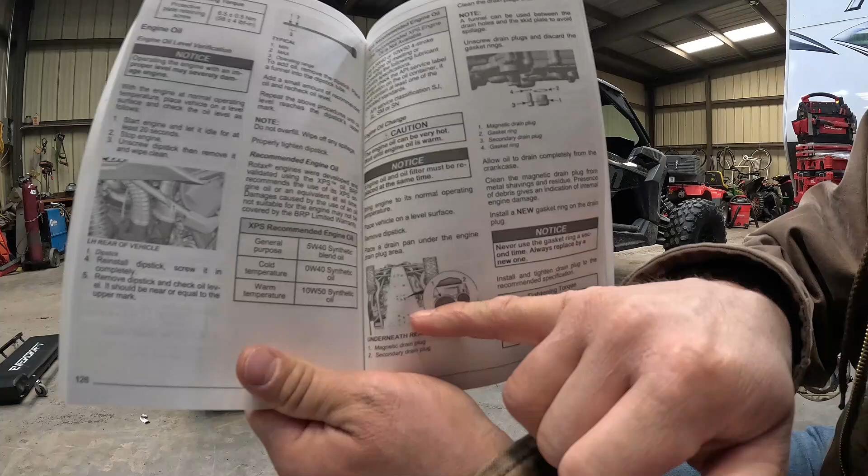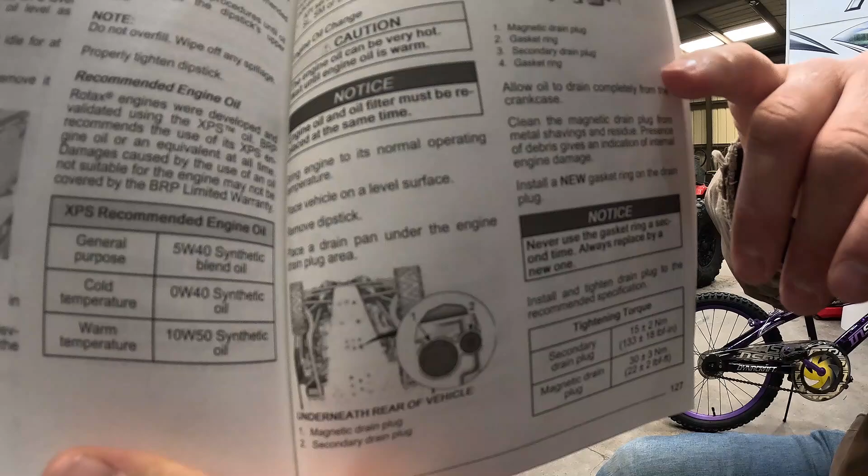When you crawl underneath your machine, you're going to find this hole here in your skid plate, and you're going to look up and see two bolts. One's going to be your primary magnetic drain plug, which is the big fat one, and then your secondary, which will be the skinny one.

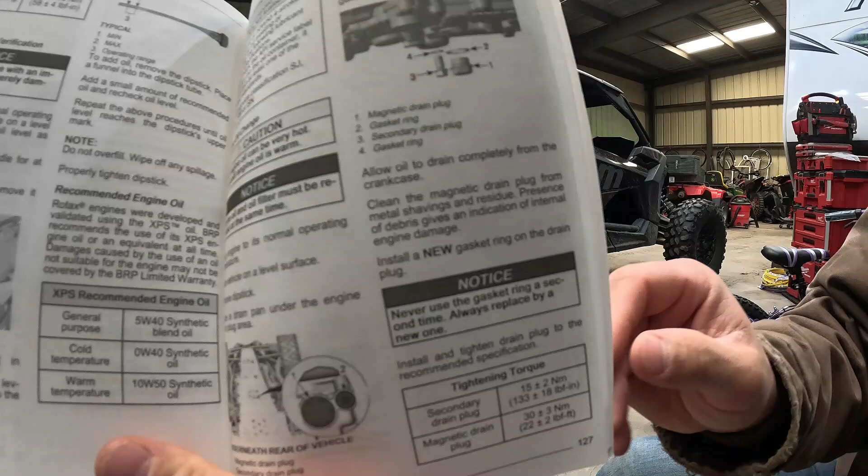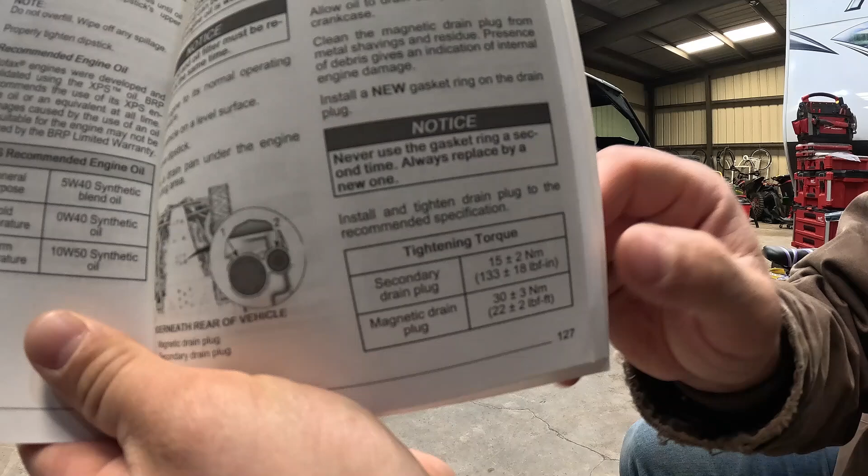Here's your torque specs for your secondary, which is your small one. So 15 plus or minus 2 Newton meters, or equivalent to 133 plus or minus 18 inch-pounds.

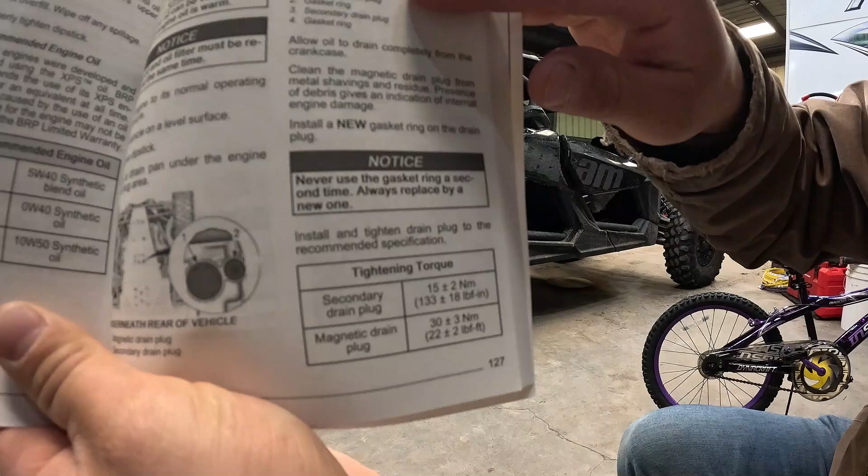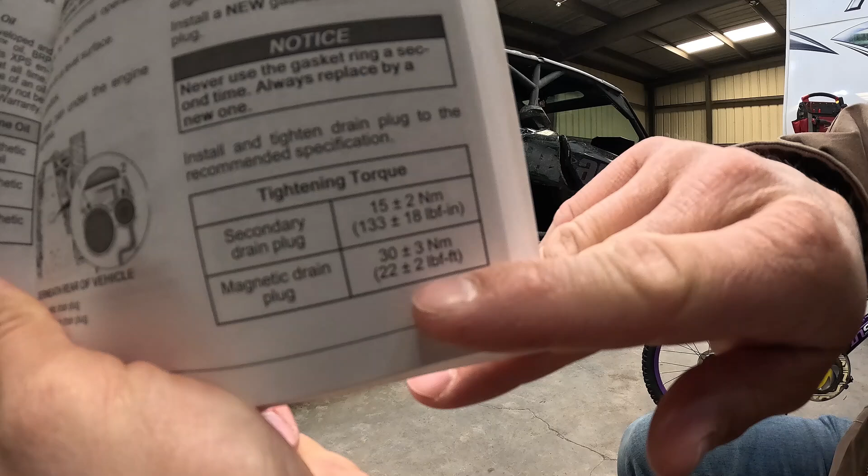The magnetic drain plug, which is your big one, is going to be 30 plus or minus 3 Newton meters, or equivalent to 22 plus or minus 2 foot-pounds. So within the range of 20 to 24 foot-pounds on your magnetic drain plug here.

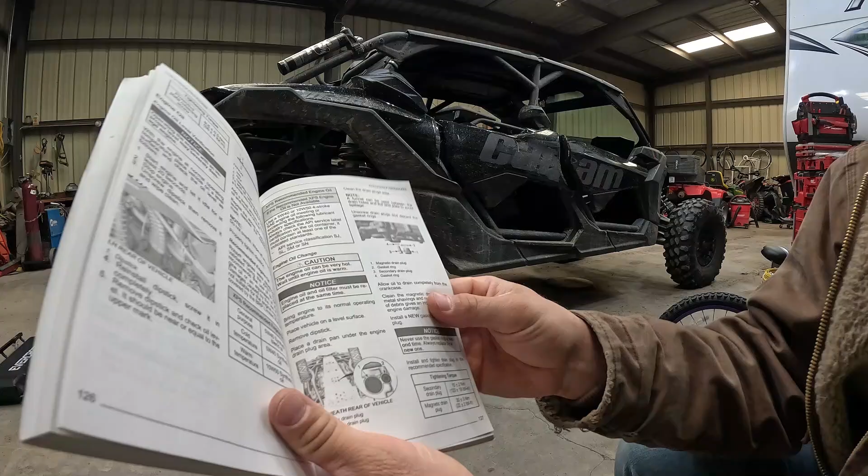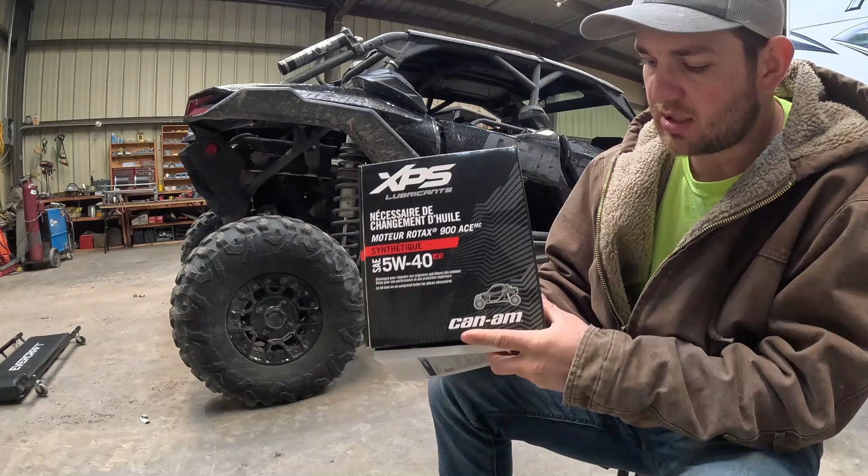The oil capacity for this machine is going to be 3.7 quarts right there. And what I did here was I just got this XPS oil change kit. Comes with everything you need: 4 quarts of oil, the oil filter, and your rings to replace the primary and secondary oil seal rings. So let's get started.

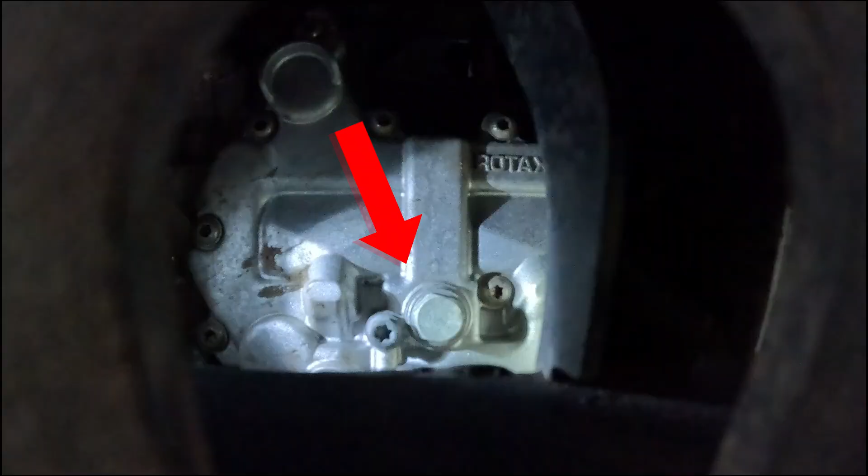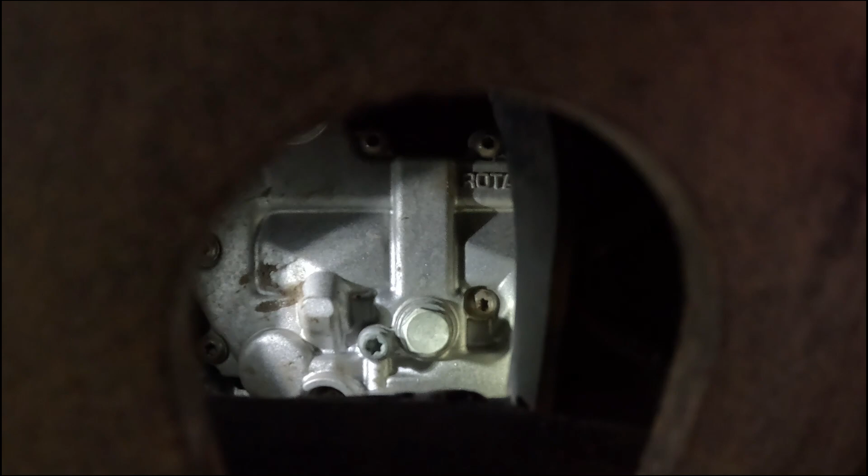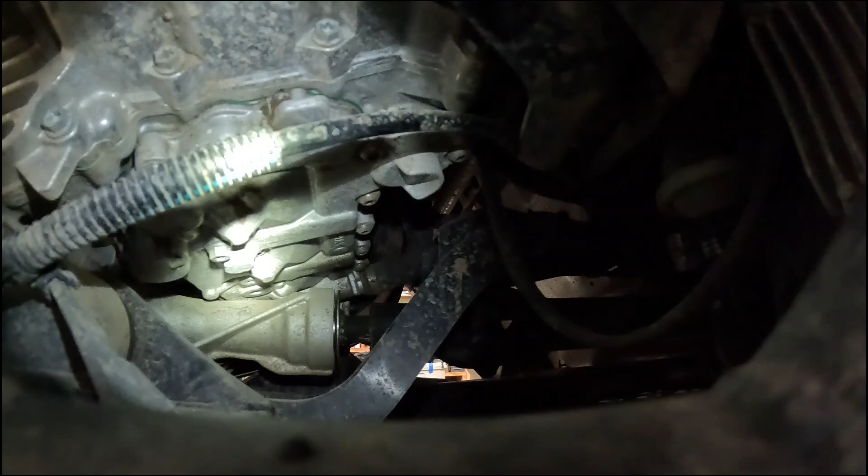So I crawled up under here, and I'm going to show you the drain bolts. They're right there. You kind of have to look for them. You got to scooch up a little bit and you'll see them right up there. Kind of a side view over here. They're going to be right there.

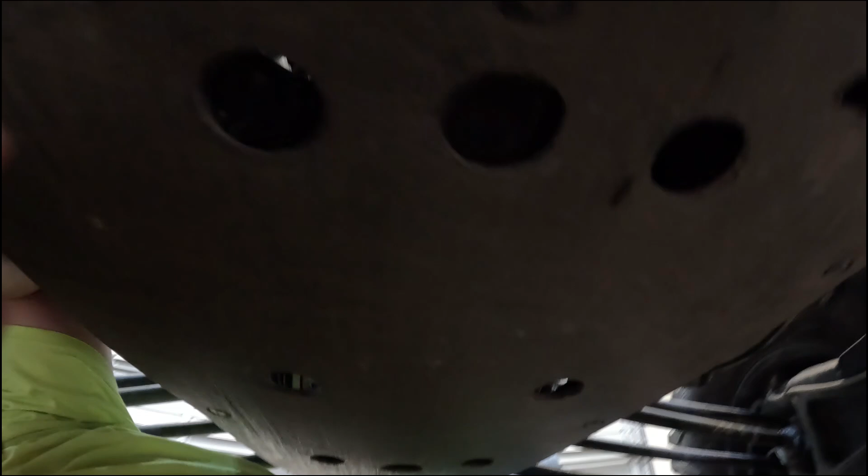So the socket sizes that I'm going to use, it's going to be a 17 millimeter, and I'm going to use a short socket, and then a T40 for your secondary star bit.

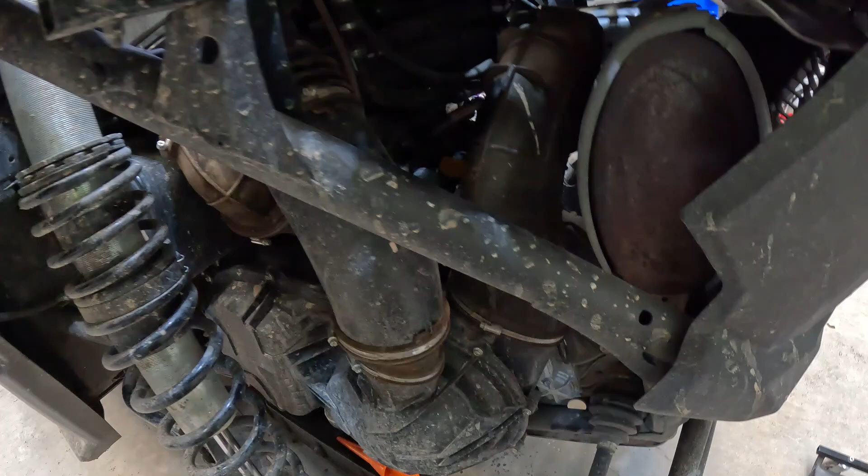The dipstick for your machine is going to be right between these two tubes here. You look in there in the engine. I'd recommend getting a rag and wiping around it, getting all the debris off around it, but it should be just right there.

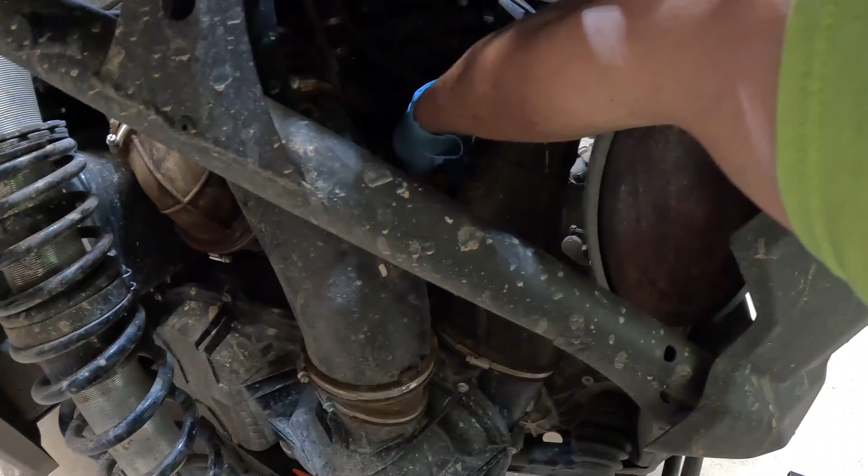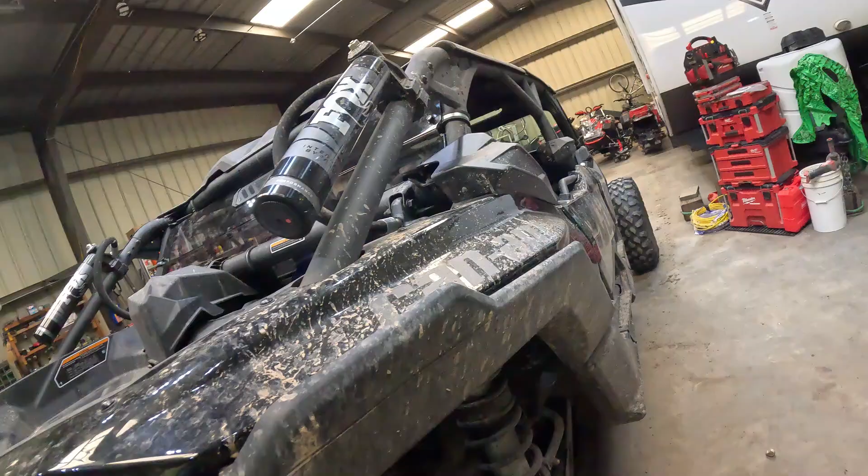And your oil filter is going to be right here. There are going to be 3 bolts. You take the cap off.

I'd recommend wiping around it also, just to get the debris, anything, so that it just doesn't fall inside there. Those are going to be an 8 millimeter socket.

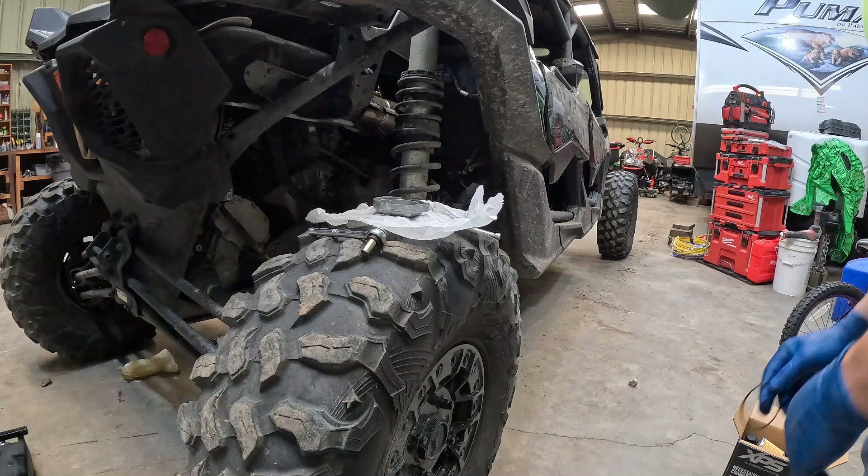I pulled the old O-ring out of this, cleaned it up, got all the old oil out. Here's the new O-ring. Slap that on there. There's a certain orientation that this goes. There's a notch in this cap here.

That notch is going to be, this is going to be your first hole closest to you here, and then the notch will be right there. And then go ahead and put these bolts on just finger tight, and then I'll let you know what the torque specs are for those.

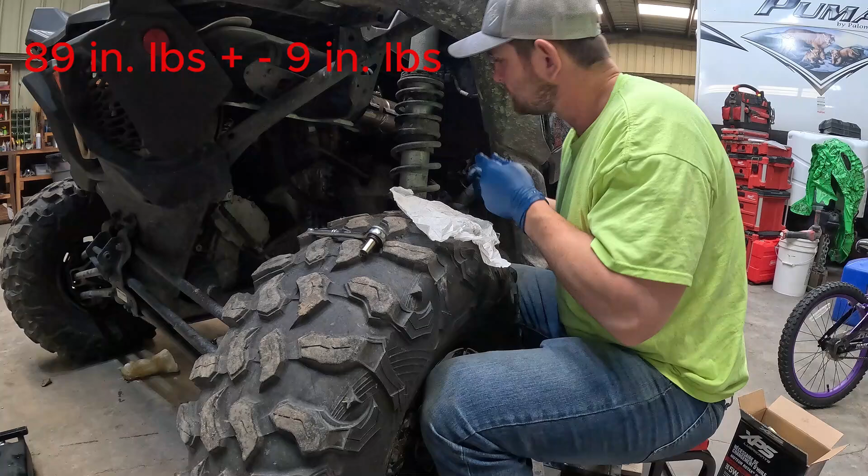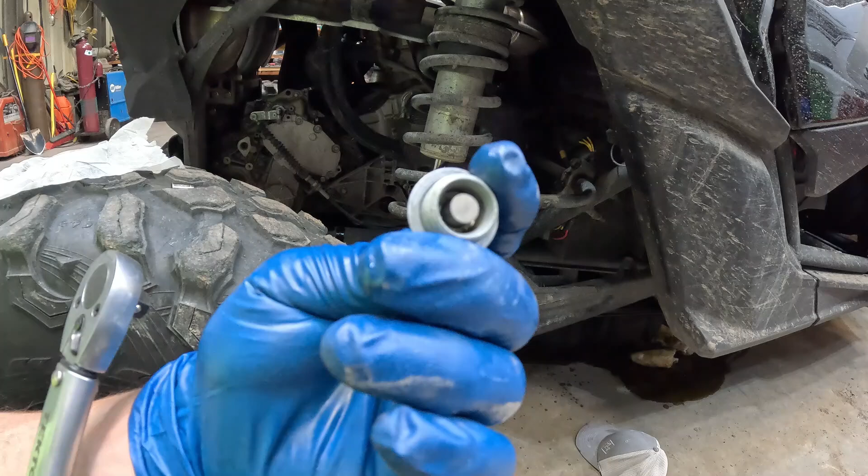So I'm going to go ahead and get my drain plugs in. Here's the primary with the magnetic piece. This is going to be torqued to 22 foot-pounds, not inch-pounds. The secondary plug, the smaller one that I just put in, that one I put in at 135 inch-pounds. It's kind of a little bare to put in there. All right, I got those installed.

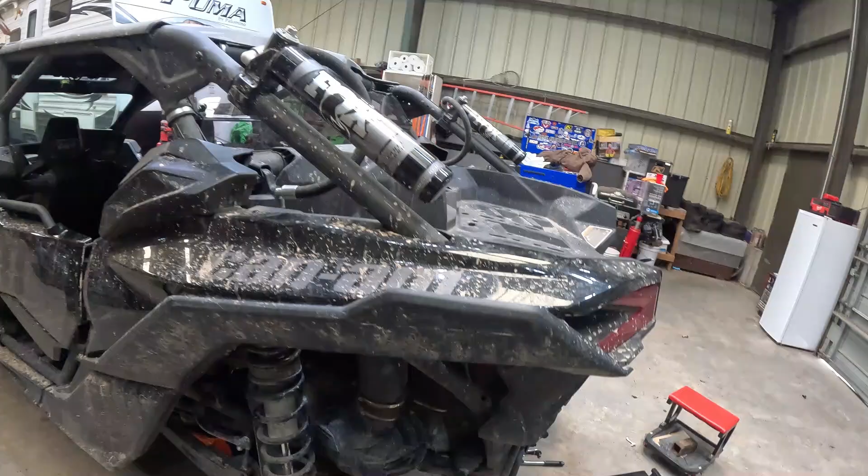Let's go ahead and put our oil in. We're gonna have to put it in through the dipstick hole. And that's gonna be 3.7 quarts.

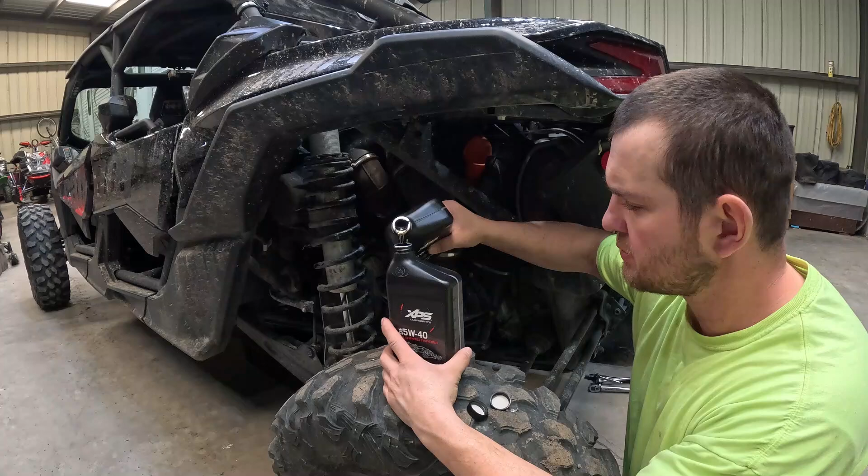So I got the oil in it, and the owner's manual says to let your machine start and run for about 20 seconds. And then when you go ahead and check your oil, you're going to want to make sure your dipstick is screwed in all the way. Pull it out, wipe it clean, and make sure you screw it in all the way down. You don't want to check it with it sitting on top of the threads.

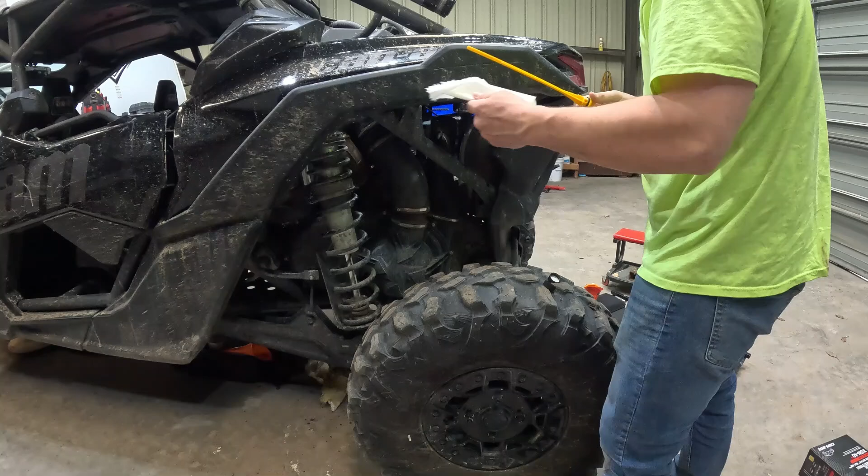Yep, that's right where it's supposed to be. You can't really see it just because it's new oil on a yellow dipstick, but that is where she's supposed to be.

So my conclusion with this oil change would be to remove the secondary plug first, because it's a lot smaller hole. You might have better luck putting a funnel in there to catch all your oil, because when I pulled that primary plug out, I mean, it was like a waterfall coming out of there.

So next time I change my oil in this, I'm going to pull the secondary plug out first, hopefully not create such a mess. Seems like every time I change oil, you're going to get oil everywhere anyways, but try to reduce that amount of spillage and mess.

But remember, you're going to need a 17 millimeter socket, a 10 millimeter socket, or a T40 star bit. And then for the top oil filter cap, it's going to be an 8 millimeter socket. And all the torque specs, make sure you torque those down correctly. So anyways, that's the conclusion of this oil change, and hope you guys found this useful.